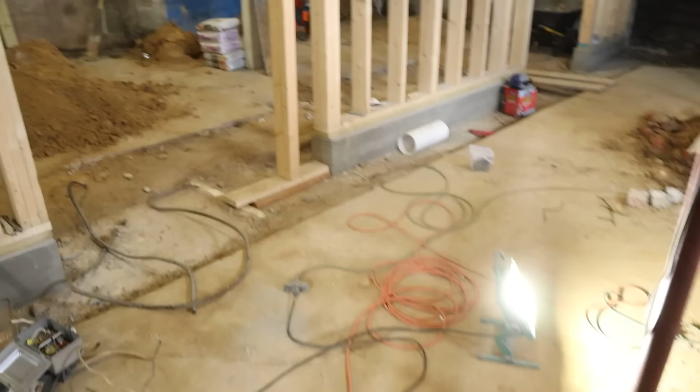Welcome to the 100% restoration and remodel of my great-great-grandfather's $7,000 mansion. For today's project, we are going to be down in the basement and we are going to be trying to address these big piles of dirt. I guess what I should say is we want to get these big piles of dirt out of the basement, and there's only one way to do it.

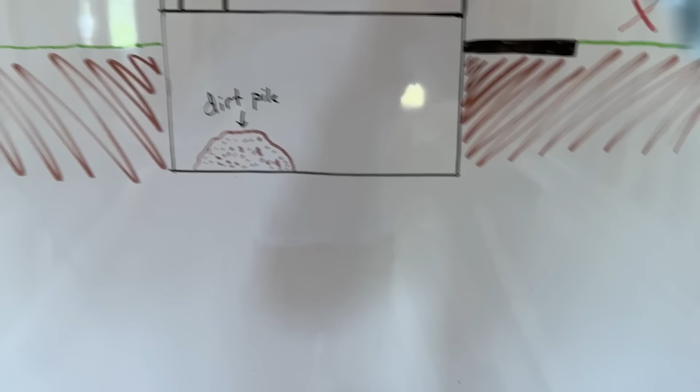Actually, I take that back. There are two options. We could carry stuff up and down the stairs with buckets, but we're not doing that. So that leaves us with our other option, which is to cut a big doorway right in the side of the foundation wall, which is what we're gonna be doing today. So for us to get our dirt pile from down here up to here, this is what we need to do.

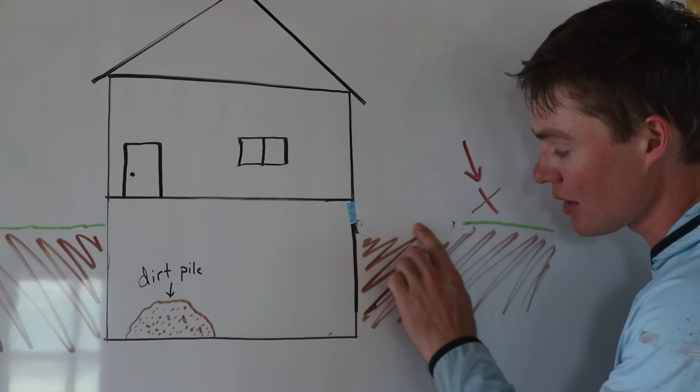The first thing that we need to do: right outside of the house, we have a concrete pad. That concrete pad is going to prevent us from being able to dig beside the house. So we need to come in and remove the concrete pad. With the concrete pad now removed, we need to do a little bit of supporting in the basement so that way we don't accidentally collapse part of the house.

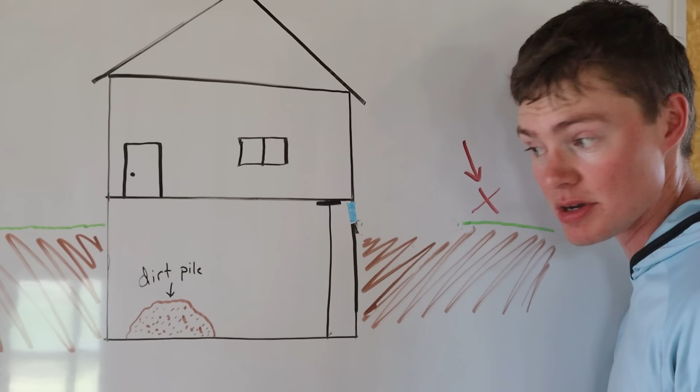So we need to build some temporary supports going from the main floor down to the basement floor. So we are going to have basically a pole helping hold the floor up. Once we have our temporary support pole in, we are going to remove the basement windows.

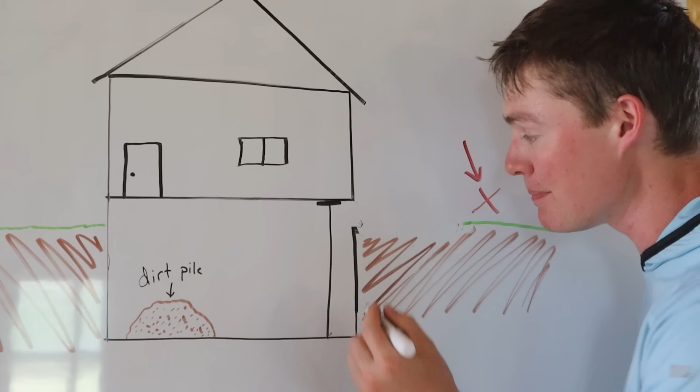Once the basement windows are removed, then we are going to come in with a giant I-beam, and that is going to act like a bridge on one side of the house, and it's gonna help hold everything up because we are going to be removing this temporary support. Once the temporary support is gone, then we will be able to come in with the backhoe and the skid loader, and we are going to be able to dig out the dirt.

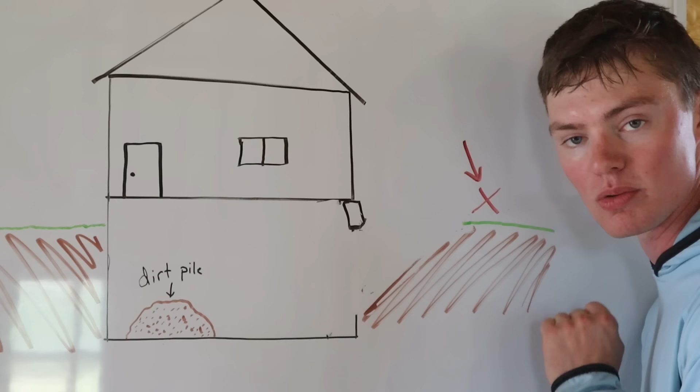And then all of a sudden, look at this. When we come in with the demo saw, which is our last step, we will be able to dig our hole right through the side of the wall, and then now we have a ramp going down into the basement where we have easy access to our dirt pile. So step number one, we need to remove this concrete here. We're outside the house and we're ready to chop this slab up into pieces so we can start digging.

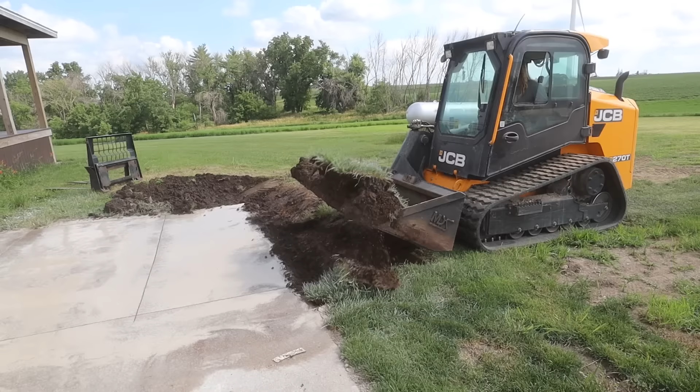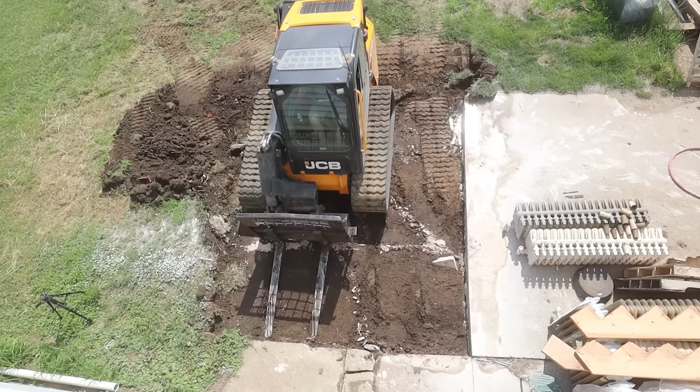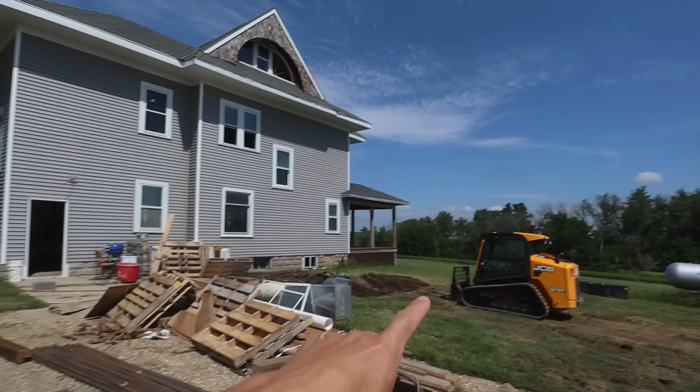So what Justin suggested to do next is to find the I-beam that we're gonna use for the opening when we cut out the hole in the basement. That's gonna be our support I-beam, and we need to go to one farm to find it, load it up on the trailer and bring it over here.

To bring the I-beam, obviously we need a skid loader that we're gonna load on the trailer, find it over there, load it up on the trailer, leave the skid loader there, and then come back for the skid loader. So you get an idea. Basically we need to bring the I-beam here.

Oh, feel that air. Yeah, that skid loader was nice too. You know what, this trip might take an hour or so.

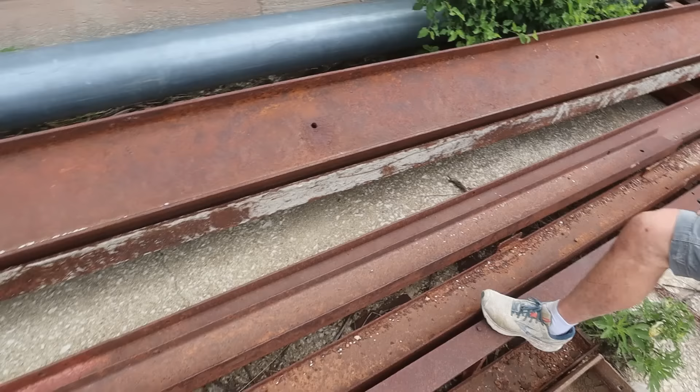We're at Kristen's and Rusty's farm, and Cole said we need to look for a building with a steel roof on it. So I guess I'm not sure what building that is where I-beams are, but we're gonna check them out and see if we can find them. Justin said Yahtzee, which means he probably found them. Something like this could work. That one? Too small. Too rusted. This one.

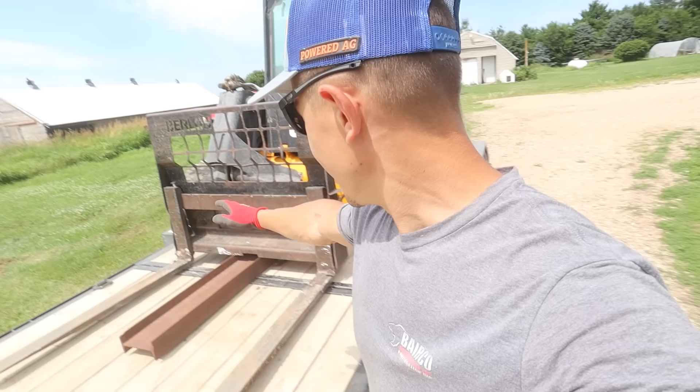Look at our setup. We were able to keep the beam on the trailer. It's all pressed down with the forks. It's not going anywhere. Put your seatbelt on. We're back with everything that we need. Now gonna get it unloaded.

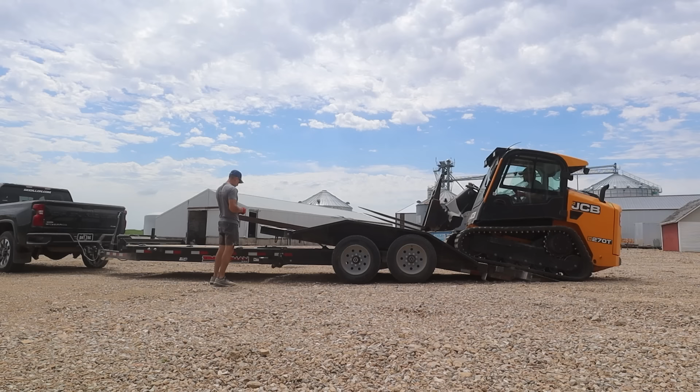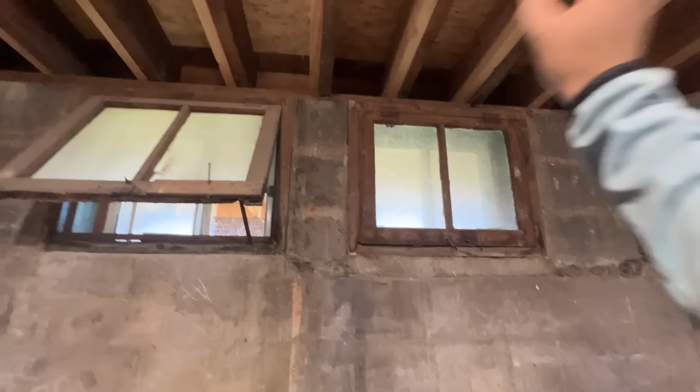Okay, we got step number one done, which is getting the concrete out. Step number two, we need to build some temporary supports. Since we are going to be tearing out these windows, the floor joists right above them are no longer going to have anything to rest on. So to keep those from falling down, we need to build a temporary support right here on the inside edge of all of these floor joists.

Our temporary support is going to look just like this big beam with the pole holding it up. The only difference is we are going to have a pole on this side and we're going to have a pole on that side, and it is just going to be right in front of the windows.

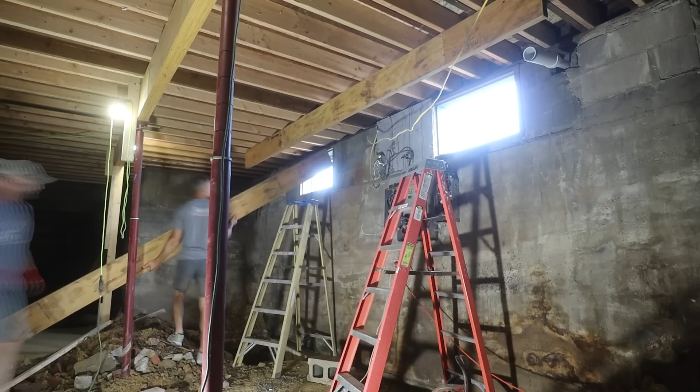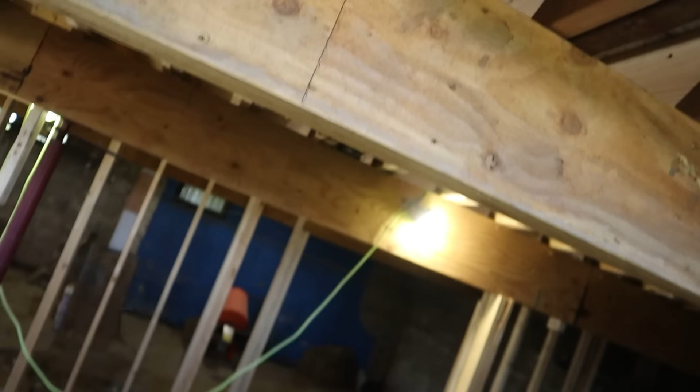Look at that. We got poles going from the basement floor up to the big beam. We got the temporary supports in. And Justin and Roman got the wooden frames out for the windows. So now we just have bare concrete holes. Justin has the jackhammer. He is now ready to rip out this block that is in between our windows. Then once we get that out, we're ready to put the I-beam in.

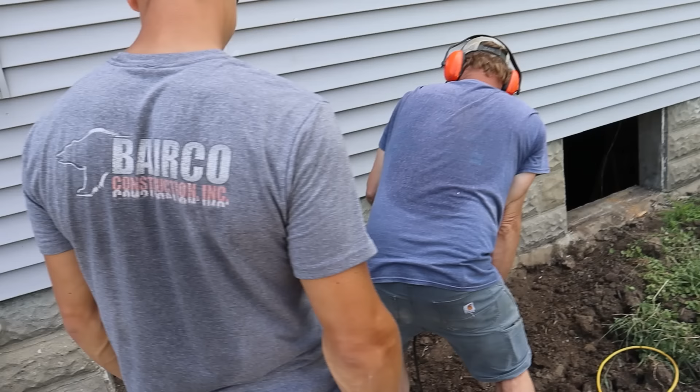The jackhammering's pretty much a two-guy job for Justin and Roman, so they got all of the big stuff out now. While they were doing that, I just pulled the skid loader up so that way they could have an easy place to throw the blocks without having to carry them way over there.

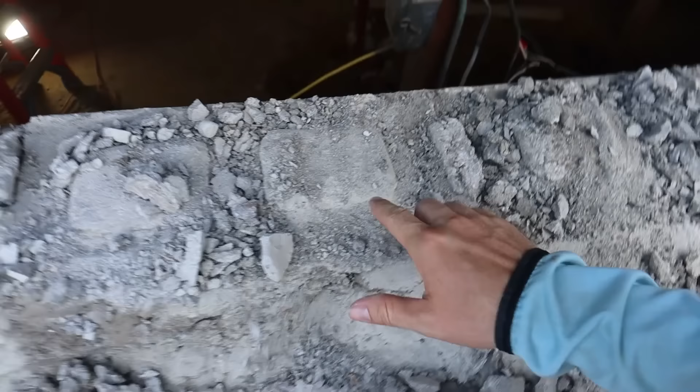But now that we got it down to this point, we need to get this last little bit cleaned out, and then we need to get all of this rugged roughness that we have on top of the monolithic concrete wall below gone. We want everything looking just like this, where it's nice and smooth. We don't want the bumps and all the ridges. And actually, this is added fill right here, so we need to take about 2-3 inches off of that. We need to get down to this part down below right here.

Justin is now on the painstakingly slow part with his chisel and his hammer. He's getting a nice clean corner over there. He wants the bottom to be smooth, so he's gonna have to get this down a little bit too. Or no, you probably don't need to get that because that's out of the way. But he's got to get that corner nice and smooth, and then we can leave the middle because this is the spot we are going to be cutting out.

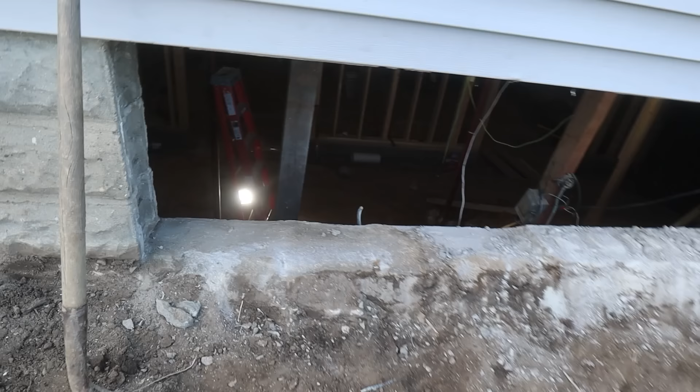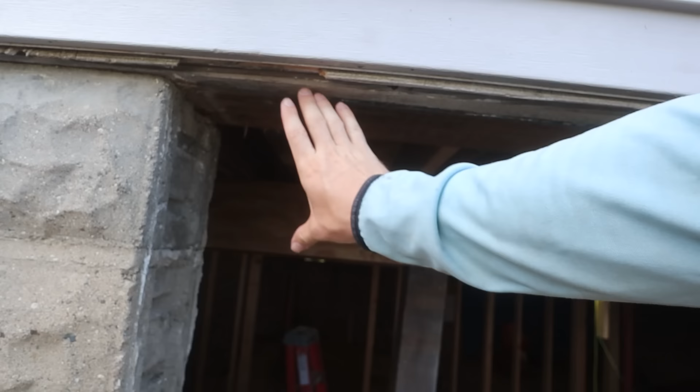Now we need to get a measurement from this block wall over to where Justin is, because we're going to be putting our I-beam right here up against the top. So where we have our temporary beam on the inside, imagine that being slid over right here on the edge of the house, and instead of being wood, it's a big old metal I-beam. That's what we're going to do.

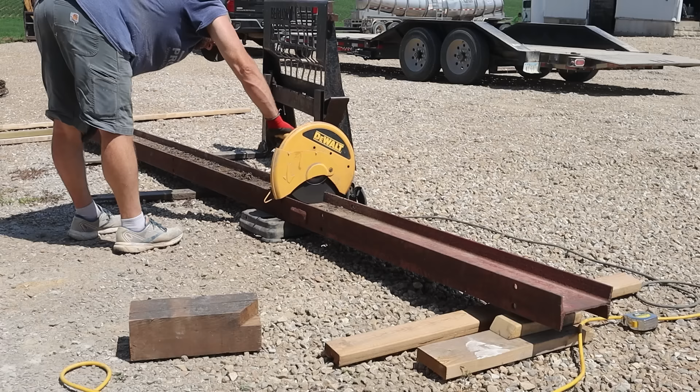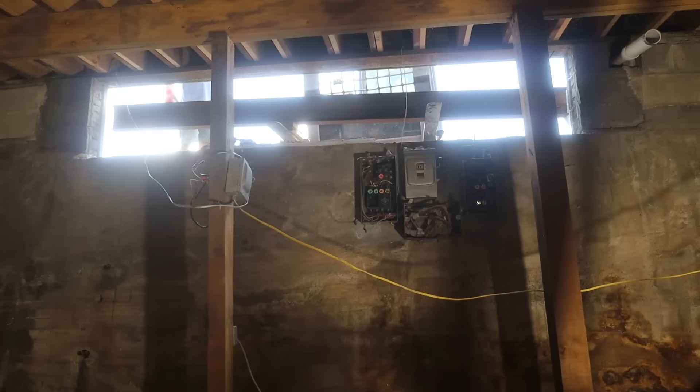Using the skid loader to lift the I-beam in is 1,000 times better than doing it by hand. But now that we got the beam up in place, we have the bottle jacks, which are pushing it up into the floor joists up on the inside. So our temporary support beam inside of there is not holding anything anymore because the big I-beam is being pushed up by the bottle jacks. This is now the temporary support beam, which is actually going to be the permanent support beam.

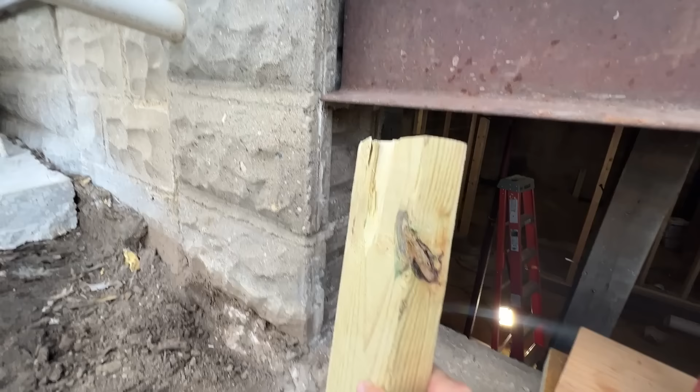So now Justin and Roman are working on getting some measurements because they're going to take boards from the concrete down below, and then they are going to mount them up underneath our beam, so that way it will end up holding this up, so the boards will end up taking the place of these blocks. Or not blocks, the jacks.

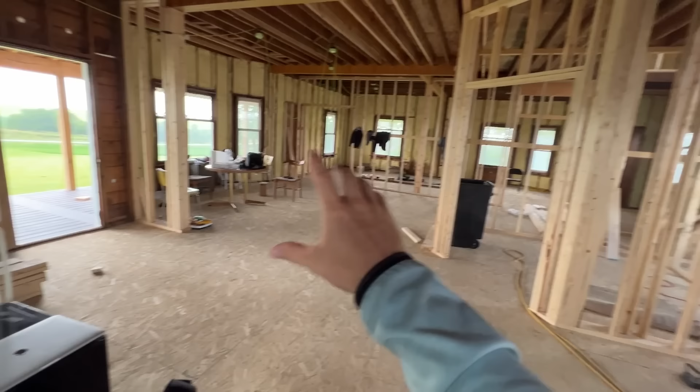Here we go. This gives a little bit better visual of what we got going on. Imagine that big beam up there is the I-beam, and then these poles that are going down on either end of the beam would be the pieces that Justin and Roman are making right now. So those are going to hold up all of the weight that the big old beam is holding up, and the beam is acting as a big bridge. In the case of that wood behind me, they call that a header. I don't know if they call that the same thing with an I-beam or not, but we're making a big old header.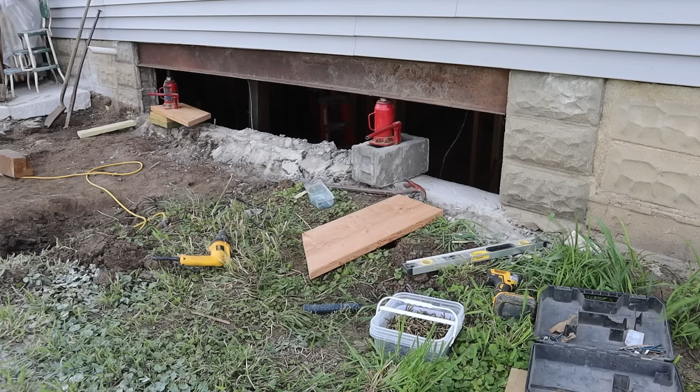You may realize I am not at the house. I am in a field, and I don't know why this seems to happen every time, but on the hottest jobs and the least fun working environments, which I guess working outside isn't half bad because you can at least stand up and you can use equipment. But it seems like when these things happen, then we have farm stuff that needs to be done. So I got called out to farm work.

Justin and Roman are going to continue working on ripping out those blocks and getting the little boards underneath of the I-beam. And then I think in the morning, I'm gonna get started digging the ramp actually down into the basement. I'm looking forward to that. But in the meantime, I am here. We are putting fertilizer. There's fertilizer in these big tanks on our corn. Nice and relaxing.

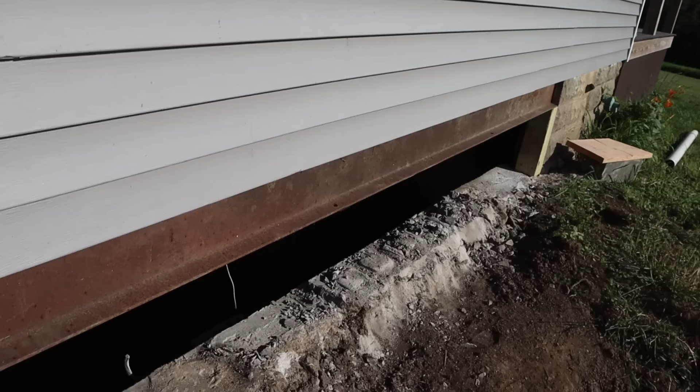Well, it looks like while I was off putting fertilizer on, Justin and Roman got all the little supports underneath the end of this I-beam. So now we have everything all open in between, and the I-beam is holding up all of the wall studs right above it, and the temporary one inside is still there, but it's not really doing anything right now. It looks like we have a bird flying around the basement. Oh boy. But I have the skid loader right here, so I'm gonna jump down in this hole and I'm gonna smooth this off a little bit.

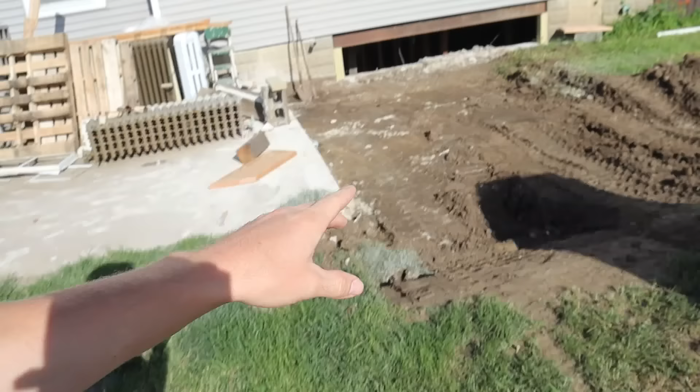I got a big ridge that I need to get out, and then Justin is rolling up behind me right now with the backhoe, and we are going to mount that in here, and I'm gonna take the backhoe arm. I'm gonna do just a little bit of digging beside the wall, because if I come in with the skid loader and I start pushing into the soil to scoop it up, I could potentially be putting force on that concrete wall, and I think it would be strong enough I wouldn't break it, but I don't want to accidentally push too hard and then break out the side of the foundation wall or crack it or something.

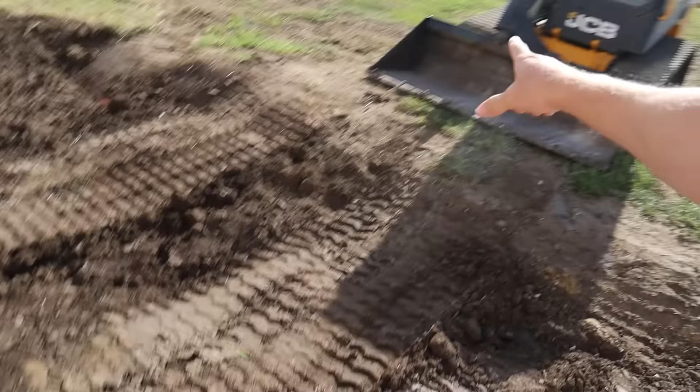This thing is way more powerful than we give it credit for. So while we're digging beside the house, we're just gonna use the backhoe. But once we get done digging right beside the house, then for out here for the actual ramp part, we're using the skid loader, because I'm way faster with that.

Oh, it's Justin's favorite animal, ants. Holy cow. Look at that, that is disgusting. Where are they going?

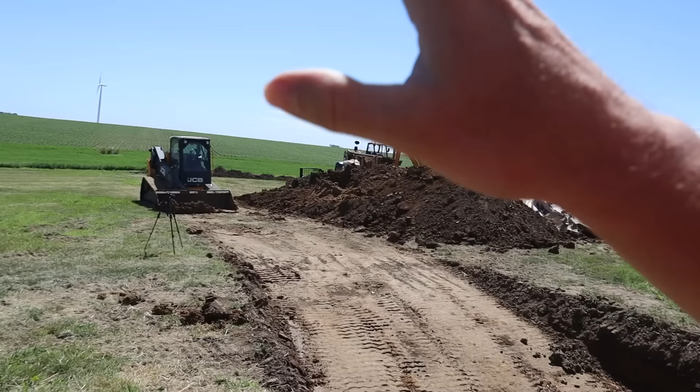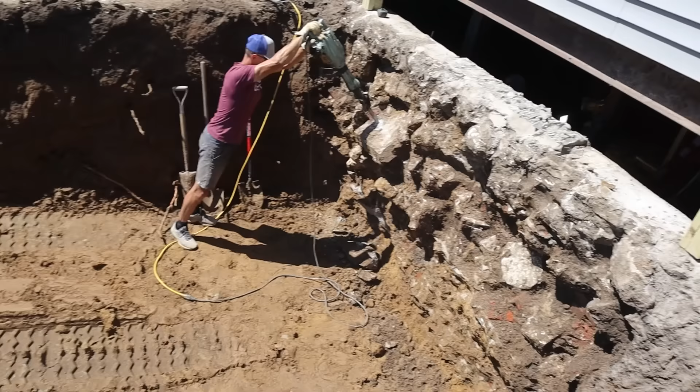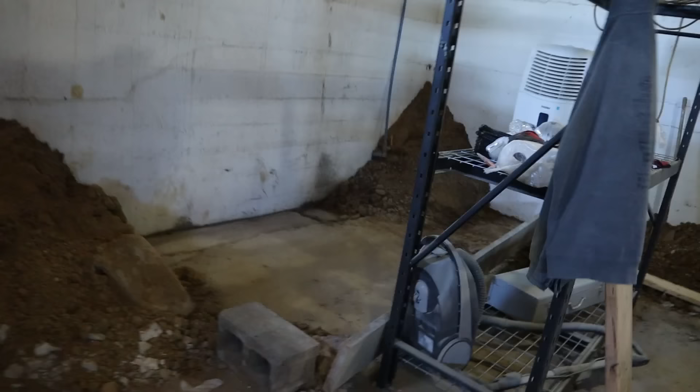Some good news, and I've got some bad news. Don't mind the jackhammering sound in the background. We'll get to that here in a second. The good news is we have a massive pile of dirt, and we have everything all dug out for our beautiful ramp. The bad news is when we look at our foundation wall, that is not solid concrete, which means we just opened up a medium-sized can of worms. When we look at the interior walls of the basement, these are solid concrete, nice and smooth, not jagged at all. It would lead one to believe that the outside of the basement wall looks exactly like the inside of the basement wall, but it doesn't.

Back in the day, over 100 years ago, when they would have poured this basement wall, to save on having to hand mix so much concrete, any rock that they would have found out in a field or a piece of concrete from another job, bricks, whatever, you name it, that was hard, they threw down inside of the wall, and then they must have put a form on the inside, then poured their hand mixed concrete in there, and then this would have been on the outside, and it is held together by the concrete that they would have poured on the other side of the wall.

So we have a little bit of a, I don't know the best way to say it, a little bit of a problem, because we wanted to just come in with a demo saw and be able to chop from the top all the way down, come over here, chop top down, and then just break out the piece in the middle, then we'd have our doorway.

But they make demo saws that can go through a wall that's like 10, 12 inches thick, maybe, if you're cutting from both sides. Maybe you can go a little more. I don't really know. But these stick out a lot, and we don't have a demo saw that we're going to be able to cut through these with.

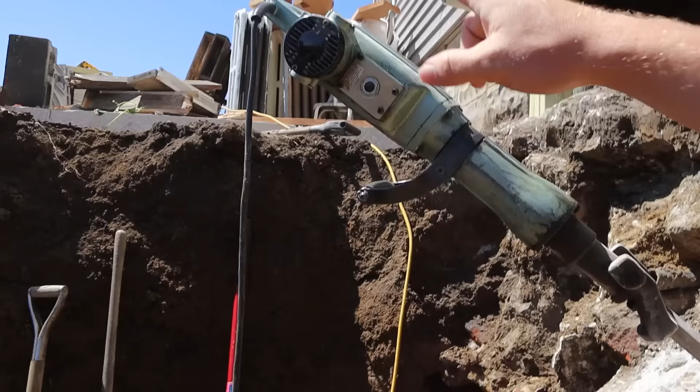So Roman's got his jackhammer in here. He's going to try to break some of these apart, see if we can get it a little bit more flush, kind of like this area, or like this spot would be a better example. And then hopefully if we get it in here, then we'll be able to come in with a demo saw and make our cuts. So that way we can actually knock out our wall.

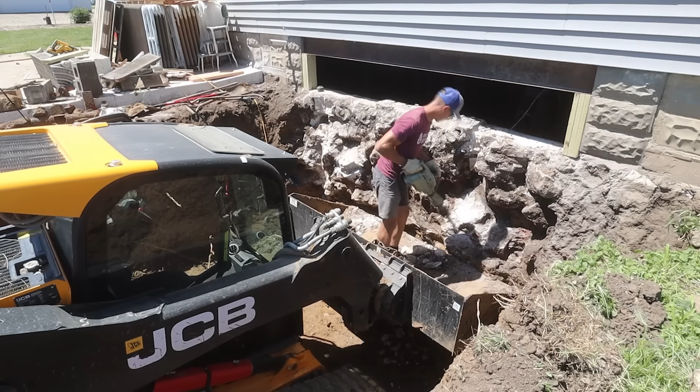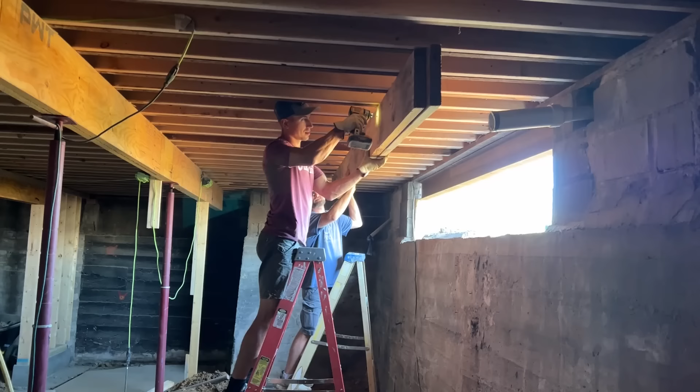Temporary beam anymore. It's all being held on our I-beam.

Hey, found a sleeping mouse. He is sleeping so deeply, he's just stiff as can be.

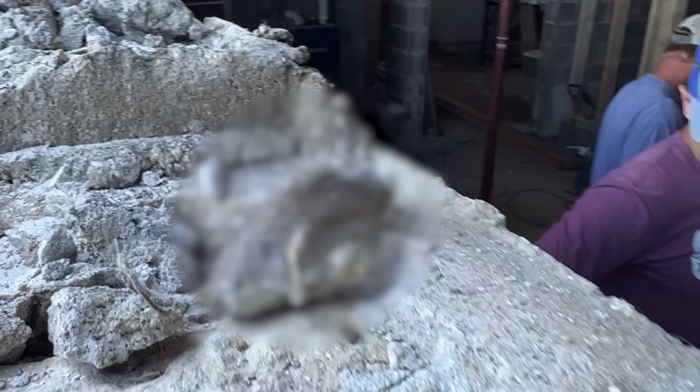After doing a fair bit of jackhammering, Roman got a spot right here chunked out. So this is brought in a little bit. So now we can get the demo saw in here to cut. And then 7 feet over on the other side, he did the exact same thing. So we're gonna have a cut right here.

You can see its little spot he has marked out on the top, and I just touched the sleeping mouse. That was kind of gross.

But we're gonna have a cut there. We'll have a cut over here. And then everything here in the middle will be gone. And then we'll have a nice big wide open door to be able to get machinery in and out underneath of the basement. So that way in the future when we get to it, we will be able to start doing some demolition work on that floor and dirt work.

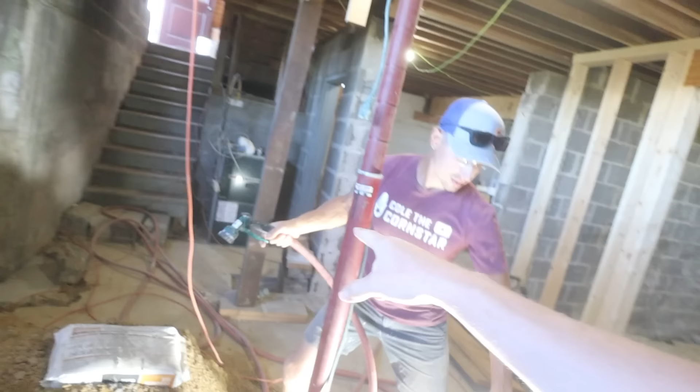And also get the big piles of dirt out of there. That's what we're trying to do right now actually. Get the big piles out of the basement. We're gonna be trying to control the dust as much as possible, so Roman's gonna be running the hose, and he's gonna be squirting that on the blade to try to keep the dust down, but we'll see how this goes. It's gonna get super dusty, just watch this.

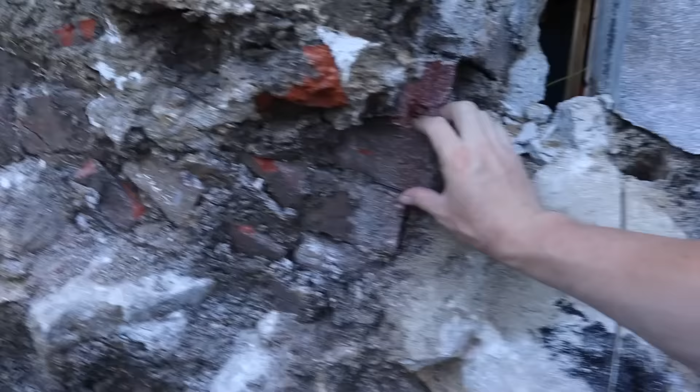I'm not going to lie, when we first exposed the side of this foundation wall and saw that it was made up of all these rocks and these bricks and just the random assortment of whatever, I was kind of concerned about the integrity of the foundation walls. What honestly made me feel better was the fact that this has been standing for over 100 years and there was so much weight in the house before with all the lath and plaster and tile floors and all the mortar they had beneath that.

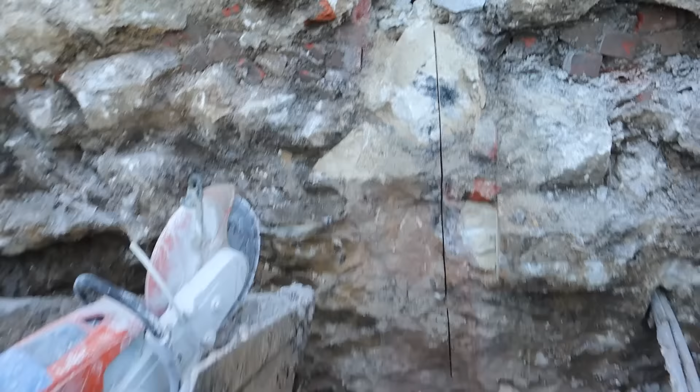I was like, you know, if it stood for over 100 years with no problems with all of that weight on it, we should be 100% fine because we are going to be putting a third of the weight back into the house. But another thing that's making me feel a lot better is the fact that we have cut on both sides as deep as this saw could go inside of the wall, and then Roman has been jackhammering and jackhammering, and you can hardly break off a piece after jackhammering on it for a minute straight. So if it's holding up that well, it's making me feel a lot better.

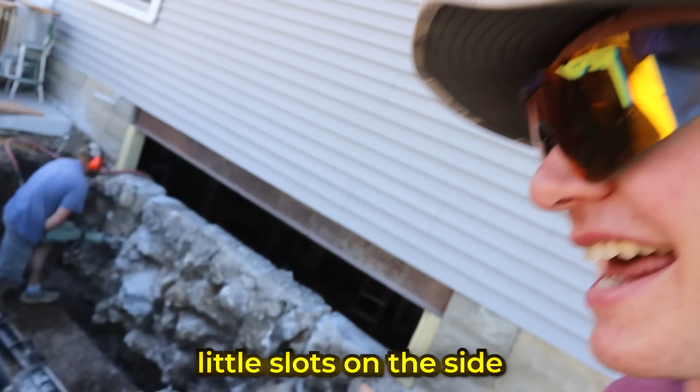Our plan of attack, now that jackhammering it apart really isn't working the best, is we're gonna try to jackhammer little slots on the side, and then we're gonna wrap that entire thing with a chain, and then we'll take the chain all the way up there to the flat. We'll back the telehandler over here, and then we'll pull on the chain with the telehandler and see if we can just pull that wall forward. Maybe it'll come out in one big piece.

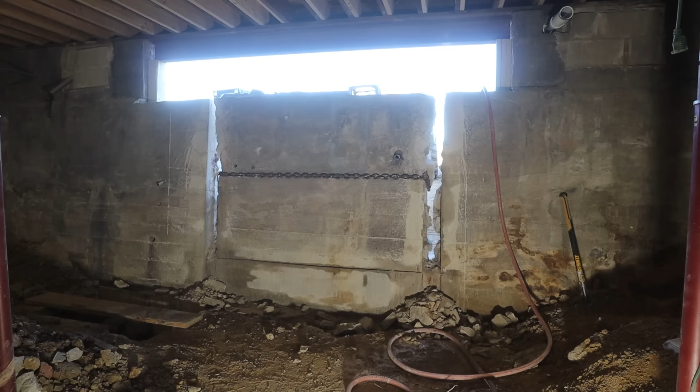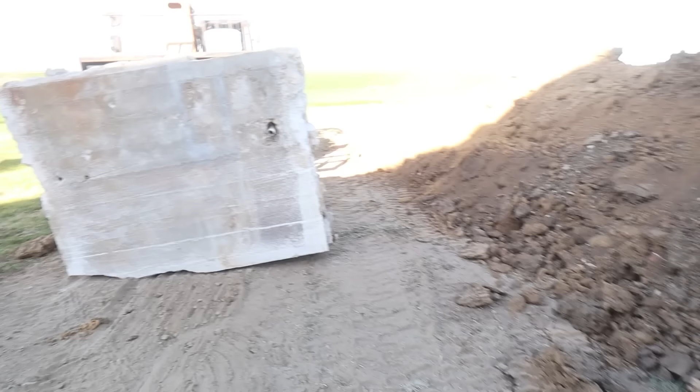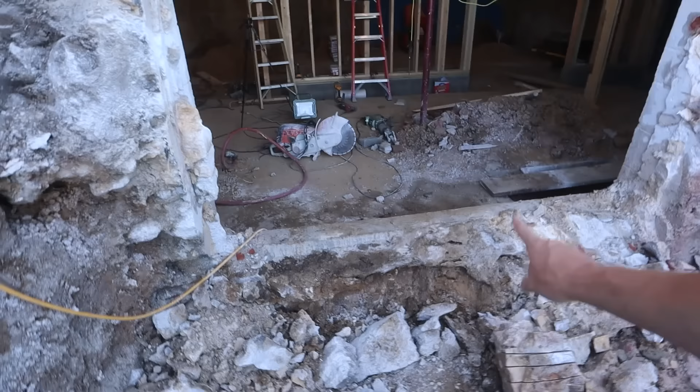Look at that! We got concrete out! We no longer have a foundation wall! Take a look at the bottom of our ramp! You can now just walk right in. Now we did leave a little piece right here at the bottom, about 16, 18 inches tall. That way, if we get rain over here and the water starts coming down, it'll have a place that it'll catch instead of just simply rushing right in and literally flooding half of the basement.

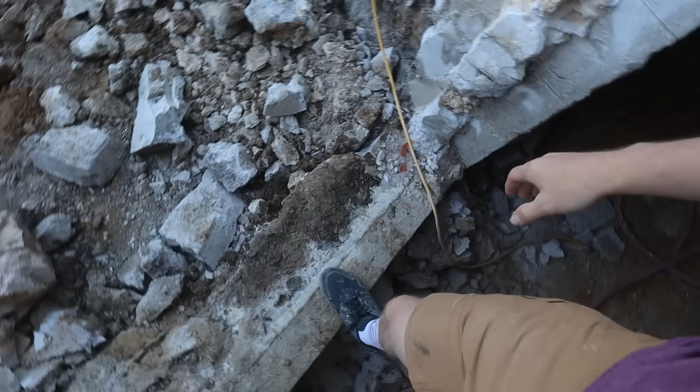So in order for us to actually get in here with a piece of equipment, we are going to have to build a ramp coming down on the inside, and we are going to have to build a ramp going down on the outside. And good news for us, we have a ginormous pile of dirt.

Now, for my whole life, the inside of the basement has always looked like smooth walls. And like I said earlier, I just assumed that the outside was also smooth. I thought the whole wall was just concrete. But when we dug down this morning and we discovered that the outside was rock, it made me really curious as to what the actual inside of the wall looked like. So check this out. They must have laid in the rocks. We feel like they dug.

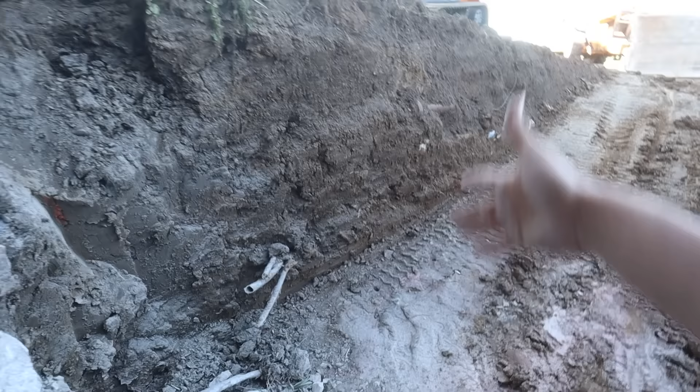So basically they would have had a hole just like this. And we think they set all the rocks and stuff up against where they dug, where the actual dirt wall was. And so rocks would have been here, and then they would have put a wood form right here. So rocks, wood form, there would have been a little bit of a cavity in between, and they filled that cavity with concrete. And that is apparently what they did, because looking at this, we got a big chunk of rock right here. This looks like a nice piece of granite.

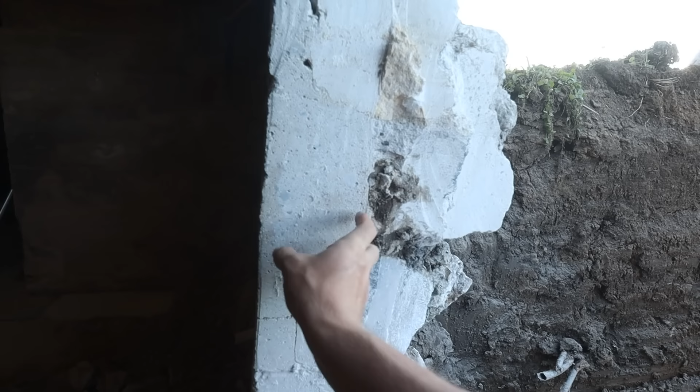And then you can see the concrete line. So like here we only have 2 inches of concrete. But then you get to spots like this where there's like 4 or 5 inches. And then it has all these spots where it just bleeds into little cracks and crevices. So super interesting. We got a spot here, kind of thinner because we had the brick there. But then you get spots like this. Look how wide that is.

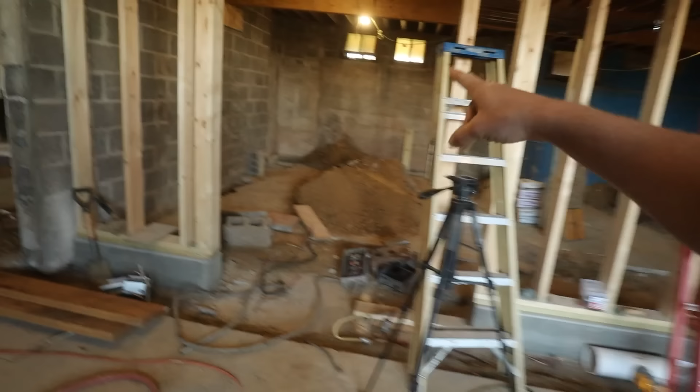Now, when we got started down in the basement and we were going to start ripping out the concrete floor, we realized, holy cow, we don't have a footer underneath of the foundation walls. So then we ended up digging things out just like this, putting the rebar in there, and then we poured footers. When we first discovered that, I was extremely curious as to how in the world the house did not settle if they did not pour a footer.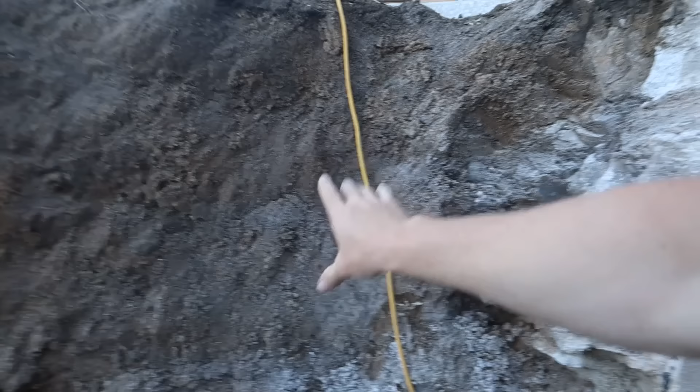But after seeing this on the outside with all these rocks, look at how much friction would be involved with this on the outside soil. So something like right here where the soil came underneath of it, if this did settle down over the years, then they would have had soil right under it, and that would have been helping hold up the bottom. So it would not have been holding just on the bottom of the wall. It also would have had a lot of help on the sides.

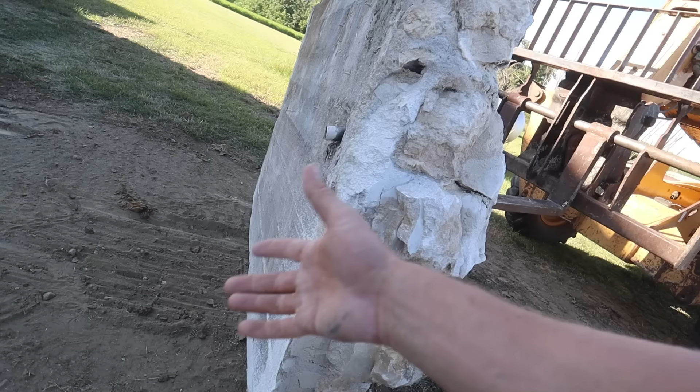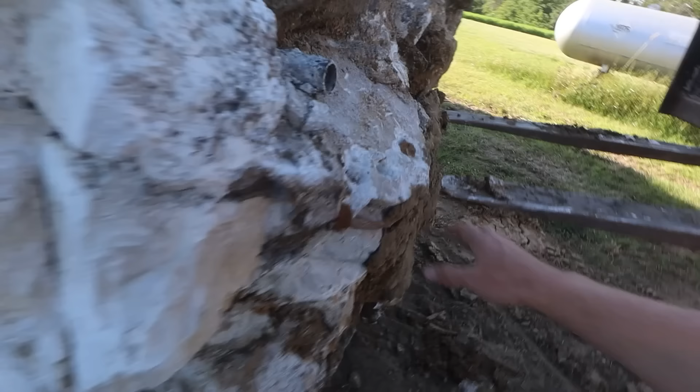I mean, just take a look at the piece that we cut out. This has a ton of big rocks sticking out of it, and there would have been a lot of area to be gripped upon on this thing. Big old chunk of concrete right here. Look, there's a big old piece of metal inside of that. Huh, that's probably why that one was so hard to break with the jackhammer.

Give you a little size reference here based off my foot. These are 10.5 shoes. So about 2 feet thick right here, maybe in that thin spot, 11 inches or so. So definitely a nice thick wall.

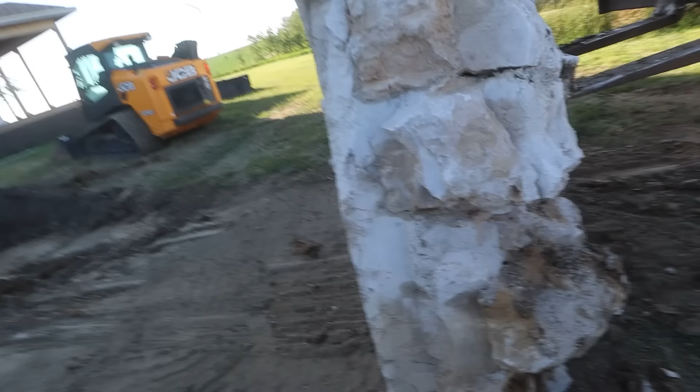But there we go. We got the house supported with the I-beam. We got our ramp dug down. We got cut through our wall, and we now have an entrance point into the basement. So now we can get equipment in here and we can clean up our piles of dirt.